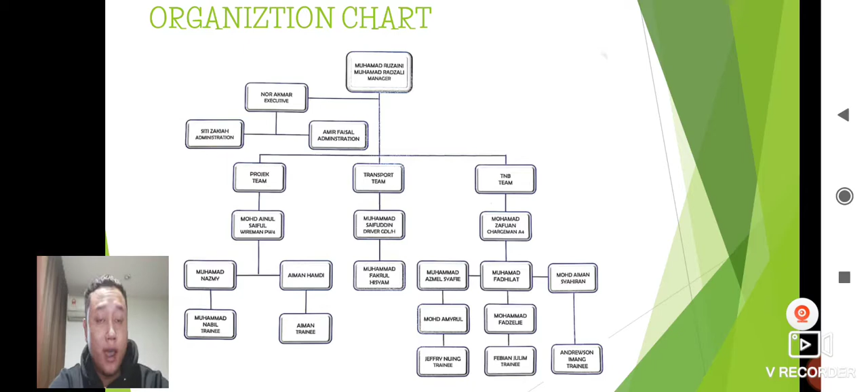The organization chart: the manager is Muhamad Ruzaini bin Muhamad Radzali. Our executive accountant is Nor Akmar. Siti Zakiah handles administration along with Amir Faisal. The project team is Muhammad Saiful. Helpers are Muhamad Nazmy and Muhammad Nabil, trainee at IKM Lumut.

The transport team is Muhammad Saifuddin as driver GDL/H, and Muhammad Fakrul Hisyam. The TNB team is led by Mohamad Zafuan as chargeman A4, along with Muhammad Azmel Syafie, Muhammad Fadhilat, Muhammad Shahiran, and Mohd Amyrul as storekeeper, Mohammad Fadzelie as storekeeper, Jeffrey Nuing, Febian Julim and Andrewson Imang, trainee at IKM Bintulu.

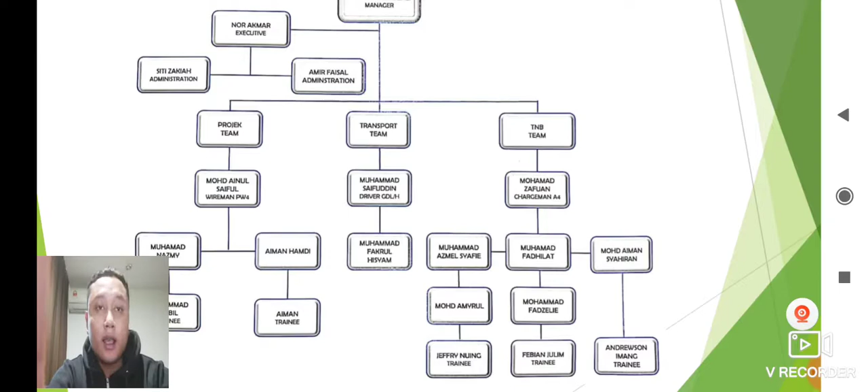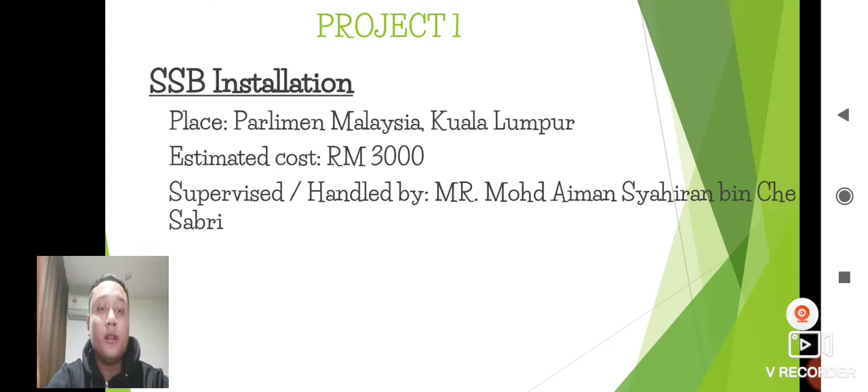Tasks and activities. Project 1: SSB installation, placed at Parliament Malaysia, Kuala Lumpur. Estimated cost is 3,000 ringgit Malaysia, supervised by Mohd Aiman Syahiran bin Che Sabri.

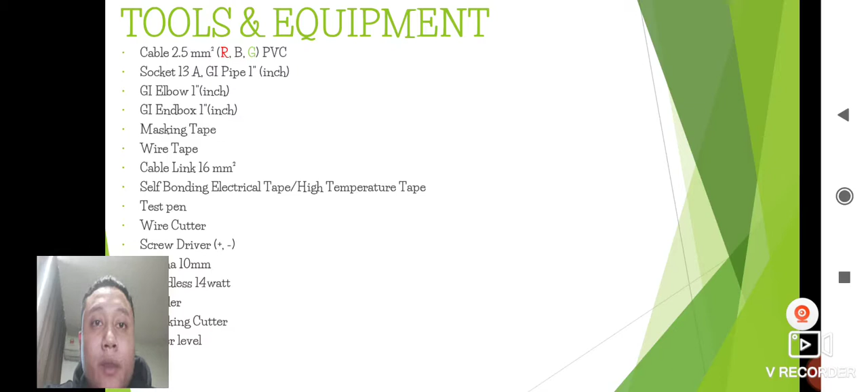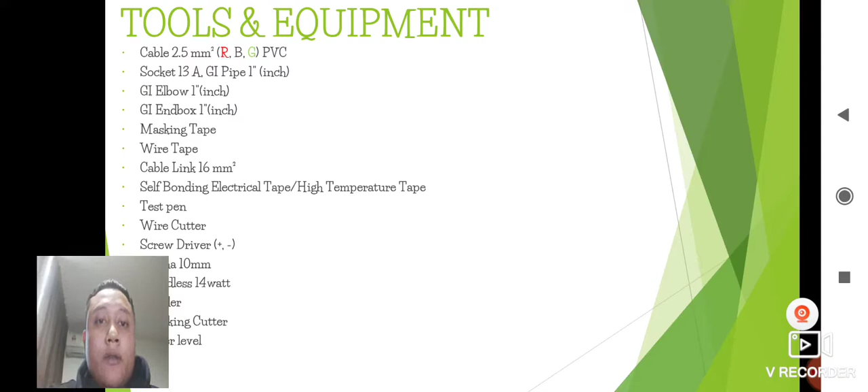Tools and equipment: cable 2.5 mm square, red, black, green PVC, socket 13 ampere, GI pipe 1 inch, GI elbow 1 inch, GI endbox 1 inch, masking tape, wire tape, cable link 16 mm square, self bonding electrical tape or high temperature tape, test pen, wire cutter, screwdriver, spanner 10 mm, cordless 14 watt, grinder, trunking cutter, water level.

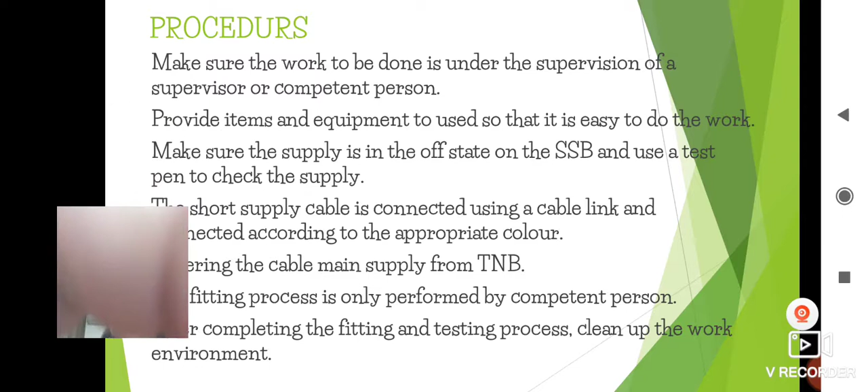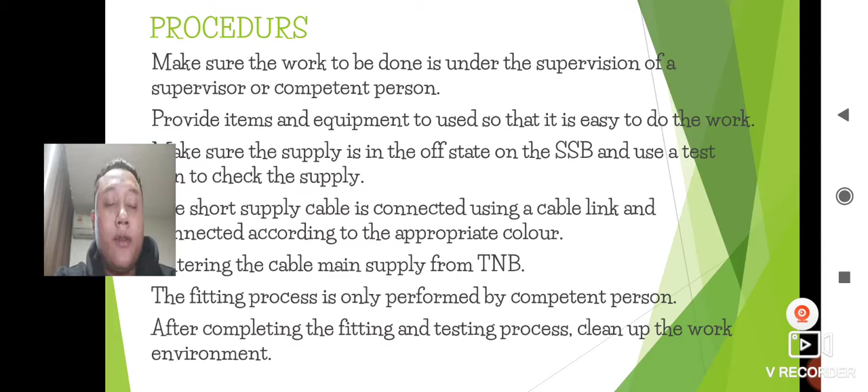The procedure is: make sure the work to be done is under supervision of a supervisor or competent person. Make sure the supply is in an off state at the SSB and use a test pen to check the supply. The short supply cable is connected using a cable link, connected according to the appropriate color. Enter the cable main supply from TNB. The fitting process is only performed by a competent person. After completing the fitting and testing process, clean up the work environment.

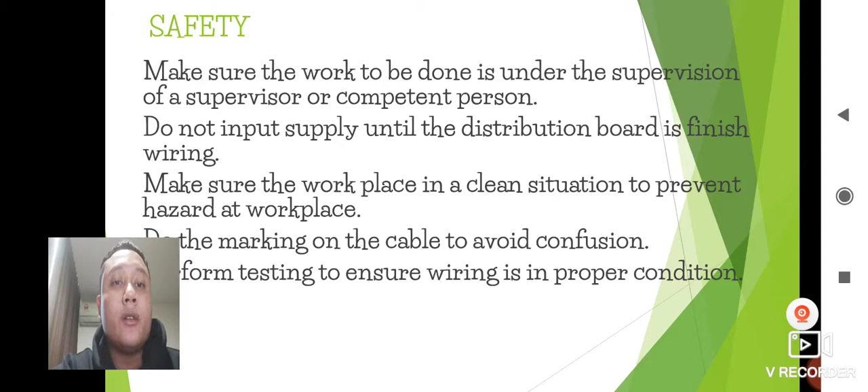Safety: make sure the work to be done is under the supervision of a supervisor or competent person. Do not input supply until the distribution board has finished wiring. Make sure the workplace is in a clean situation to prevent hazard at the workplace. Do the marking on the cable to avoid confusion. Perform testing to ensure wiring is in proper condition.

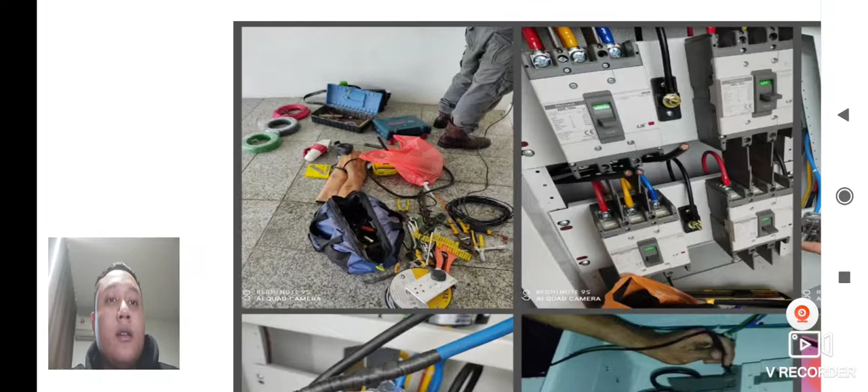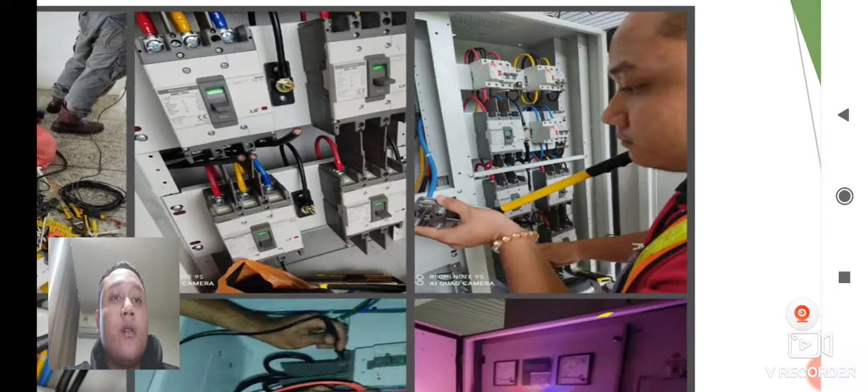As you can see in the picture, this is the equipment and tool, the MCCB. The trainer is doing the work, and here are other pictures.

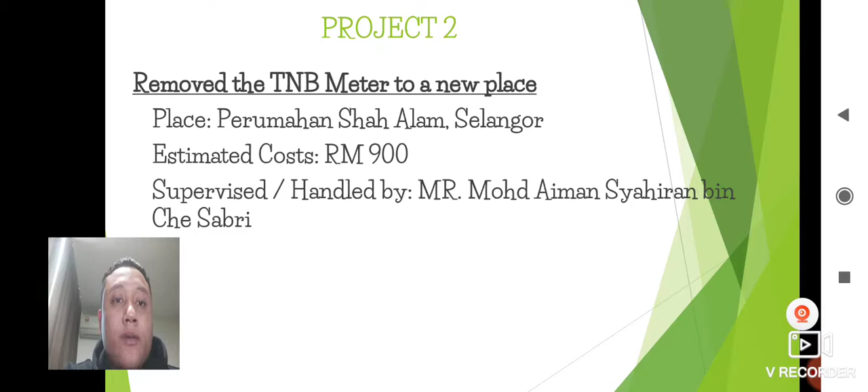Project 2: Remove the TNB meter to a new place. Location: Perumahan Shah Alam, Selangor. Estimate cost RM900. Supervised or handled by Muhammad Aiman Syahiran bin Che Sabri.

This is all the tools we need to do the work, especially the armor cable 2 core 25mm square SWA PVC and the heat shrink tube 25mm.

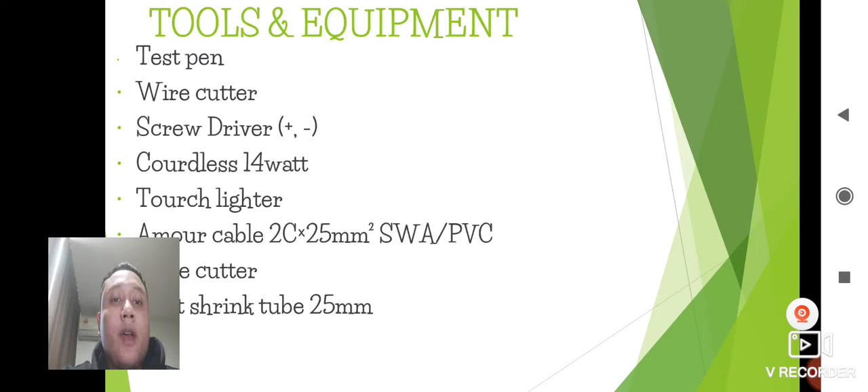The procedure is: make sure the supply is in off state on the meter and use a test pen to check the supply. Remove all components such as main fuse and meter TNB from the old place to the new place and the new component.

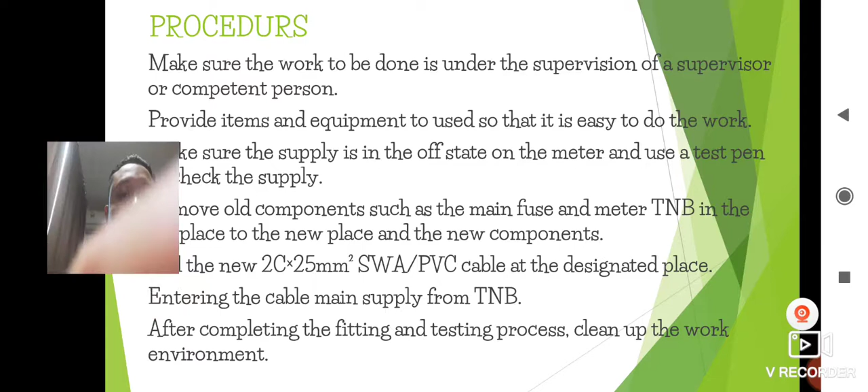Pull the new 2 core 25mm square SWA PVC cable at the designated place, entering the cable main supply from TNB. After completing the fitting and testing process, clean up the work and environment.

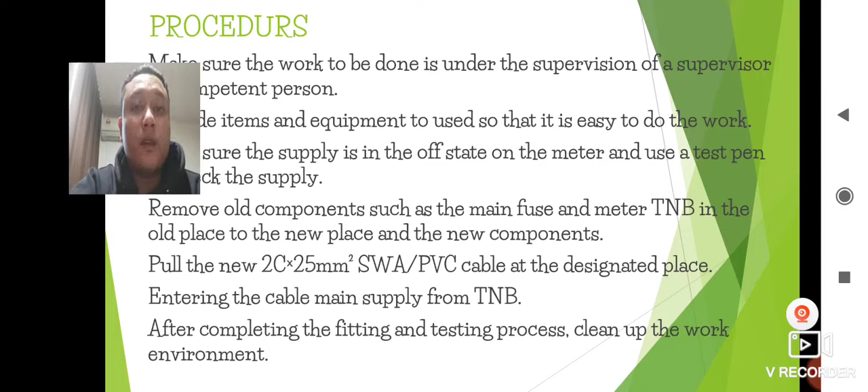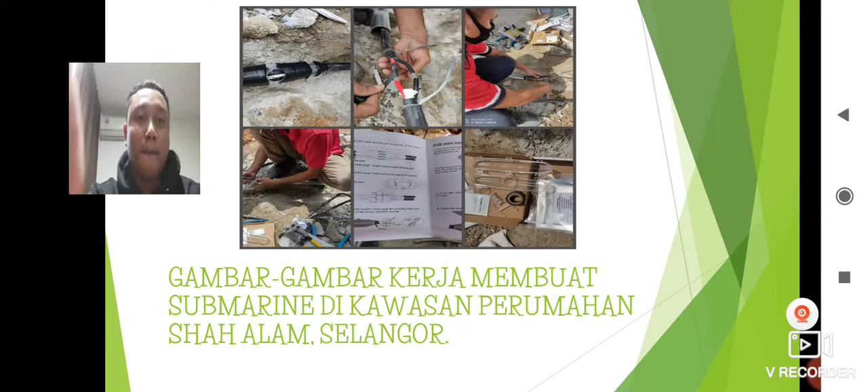Project 3 is plant rods earthing to the street lighting panel. Location: Sungai Chua, Kajang, Selangor. Estimate cost is RM3,000. Supervised and handled by Encik Muhammad Aiman Syahiran bin Che Sabri.

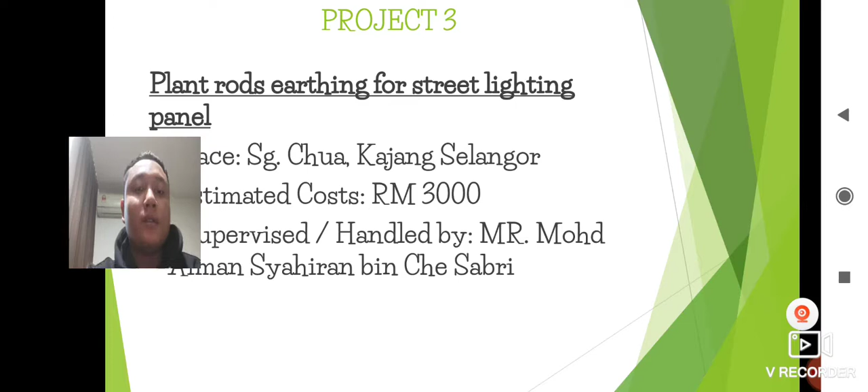As you can see, this is all the tools and equipment that we use to do the work.

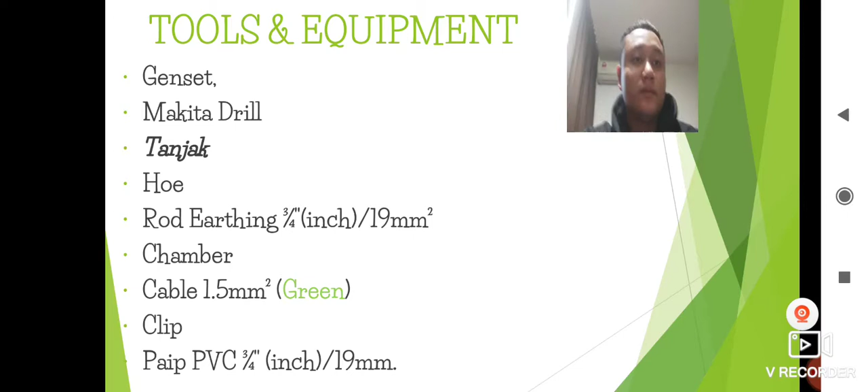Procedure: make sure the work to be done is under the supervision of a supervisor or competent person. Hold a place to store the rod and an earthing chamber. Plant the rod using a drill.

Reclose the chamber environment using soil. Make a test on earthing and the reading should get a reading below 10 ohm according to the specification of Suruhanjaya Tenaga or ST.

Make sure to use full PPE (personal protective equipment) while doing the job. Make sure the workplace is in a clean condition to prevent hazard at the workplace. As you can see, this is the picture while doing the earth chamber.

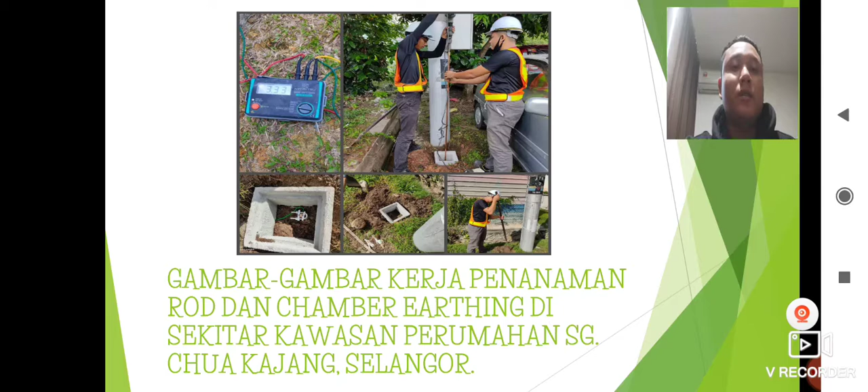Project 4 is street lighting panel installation, overhead. Location: Sungai Chua, Kajang, Selangor. Estimate cost is RM3,000. Supervised or handled by Encik Muhammad Aiman Syahiran bin Che Sabri.

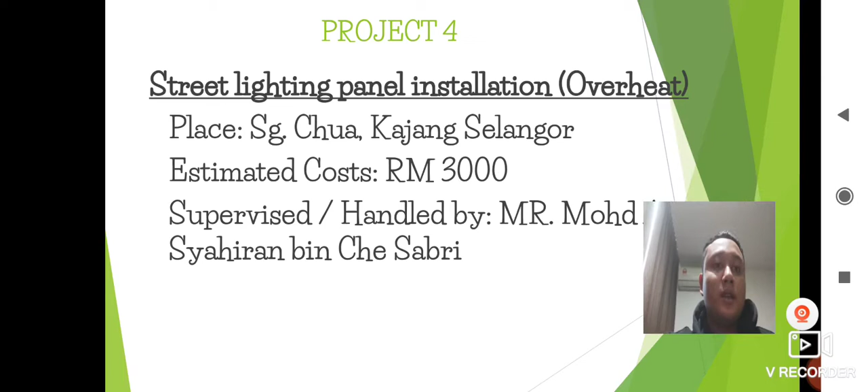This is the tool and equipment that we use to do the work. The important tool or equipment is the IPC, insulation piercing connector, 1.5 to 6mm square, and cable 16mm square ABC aerial bundle cable.

The procedure is: the PTW or permit to work form is filled in, prepared by a competent person wearing safety clothing and PPE (personal protective equipment), supervised by a supervisor or competent person.

Place the TNB signboard on the road and road cones around the workplace. Ride onto a skylift with a supervisor or competent person and bring work tools. Install the panel

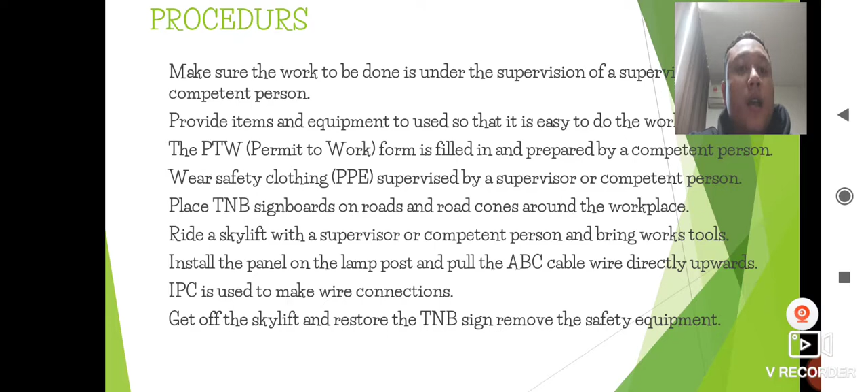on the lamp post and pull the ABC cable wire directly upwards. IPC is used to make the wire connection. Get off the skylift and restore the TNB sign, remove the safety equipment.

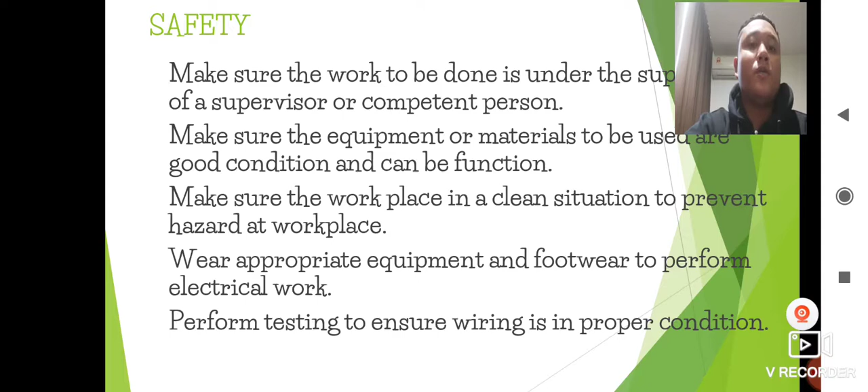The safety measures are: make sure the equipment and material to be used are in good condition and can function. Make sure the workplace is in a clean condition to prevent hazard at the workplace. Wear appropriate equipment and footwear to perform electrical works. As you can see, this is the picture that we took during the panel installation.

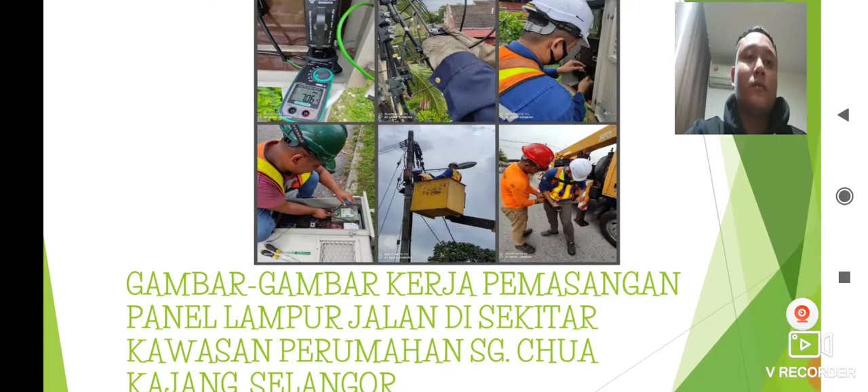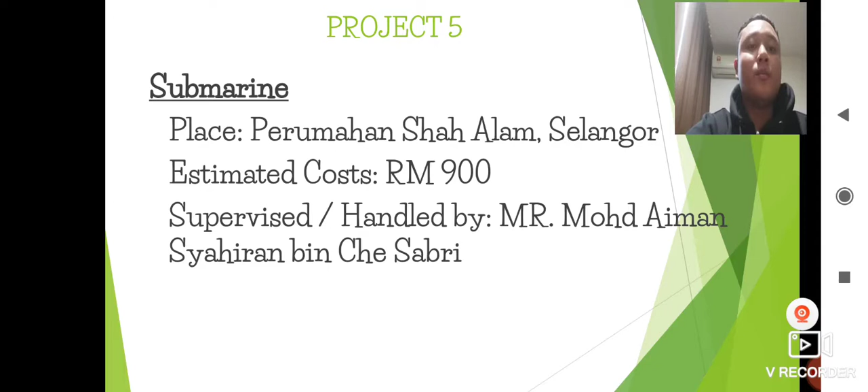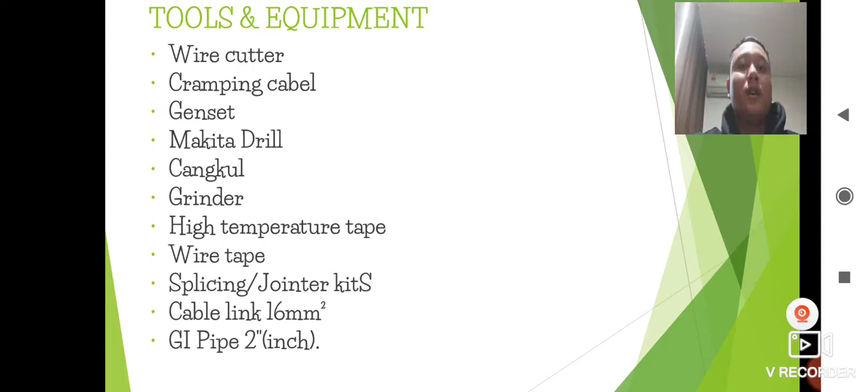Procedure: make sure the work to be done is under the supervision of a supervisor or competent person. Make sure the supply is off. Cutting paths as well as breaking paths using a grinder and drill.

Pull out the cable and connect using cable link 16mm square. The resin cable jointer is used to protect the cable, wrapped and tied. Use wire tape to prevent detachment.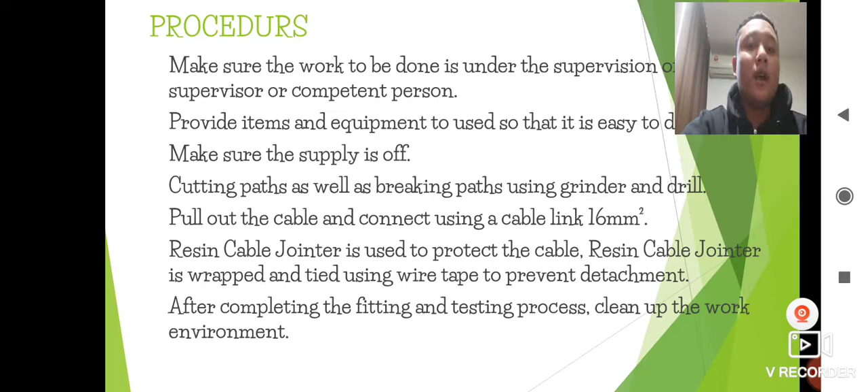After completing the fitting and testing process, clean up the work environment. The safety measure is to make sure the equipment and material to be used are in good condition and can function.

Make sure the workplace is in a clean condition to prevent hazard at the workplace. Make sure the supply is off or shut down before doing the electrical work. As you can see, this is the picture of the submarine cable.

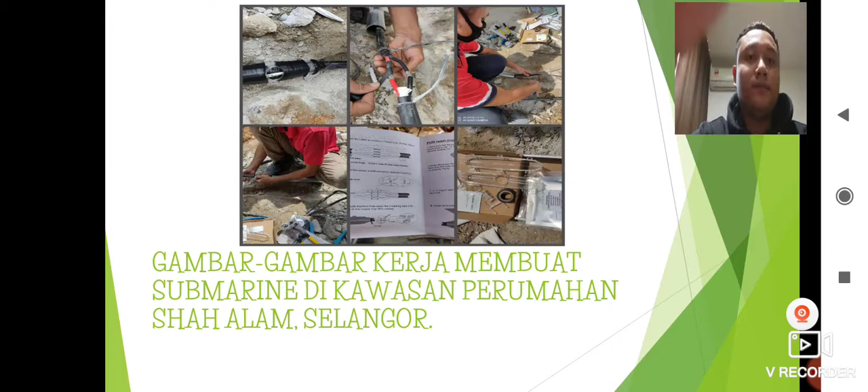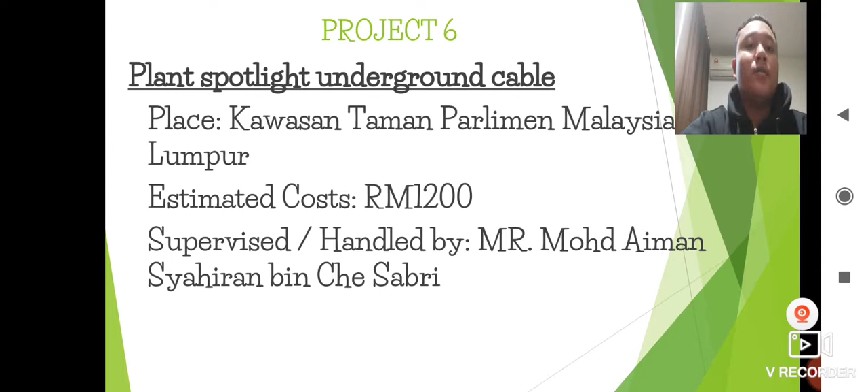Number 6 is plant a spotlight underground cable. Place: Kawasan Taman Parlimen Malaysia, Kuala Lumpur. The estimated cost is RM1,200. Supervised and handled by Encik Muhammad Aiman Syahiran bin Che Sabri.

Tools and equipment: wire cutter, screwdriver (plus and negative), test pen, cordless 18 volt, hoe, tanjak, pliers, armor cable 2 core 16mm XLPE SWA PVC, MCB C6 6 ampere, neutral link, cable 1.5mm square PVC red and neutral, screw, sand, and cable slab low voltage.

The procedure: provide item and equipment to use that is easy to do the works. Make sure the supply is off. Cutting and breaking the path using a hoe and tanjak.

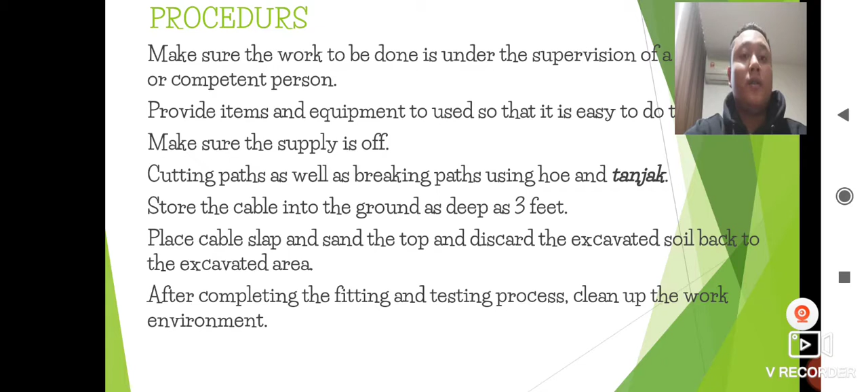Store the cable into the ground as deep as 3 feet. Place cable slab and sand on top and discard the excavated soil back into the excavated area. After completing the fitting and testing process, clean up the work environment.

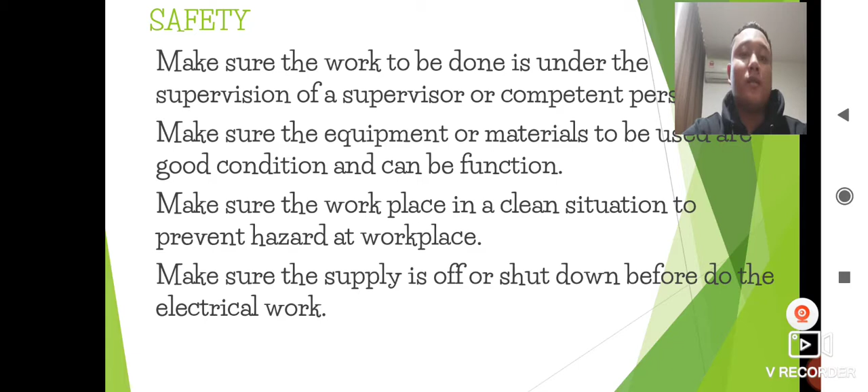Safety: make sure the equipment or material used are in good condition and can be functioned. Make sure the workplace is in a clean situation to prevent hazard at the workplace. Make sure the supply is off or shut down before doing the electrical work.

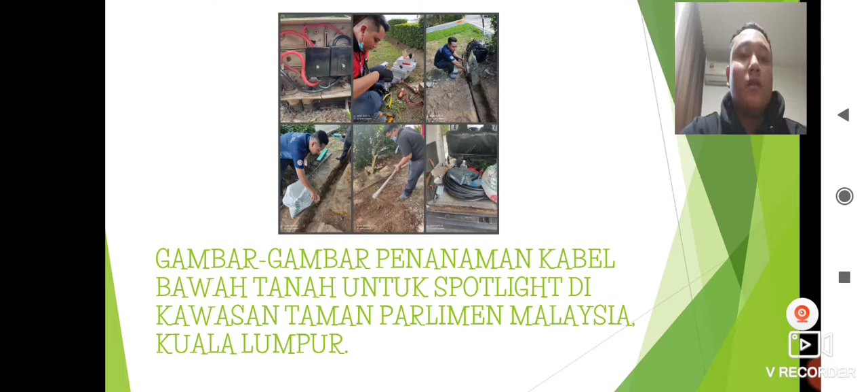As you can see, this is the picture that shows us doing the plant of spotlight underground.

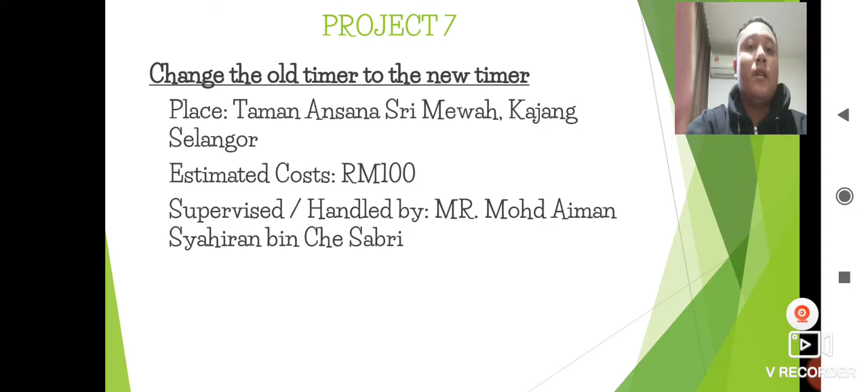Project 7: Change the old timer to a new timer. Place: Taman Ansana Sri Mewah, Kajang, Selangor. Estimated cost RM100. Supervised and handled by Encik Muhammad Aiman Syahiran bin Che Sabri.

Tools and equipment: cordless 18 volt, test pen, screwdriver, wire cutter, ladder, timer brand Hager, cable 2.5mm square, red and black.

The procedure: provide item and equipment to use that is easy to do the work. Make sure the supply is off, make the wiring on the timer, and make sure there is no connection fault. Set the timer according to the set time.

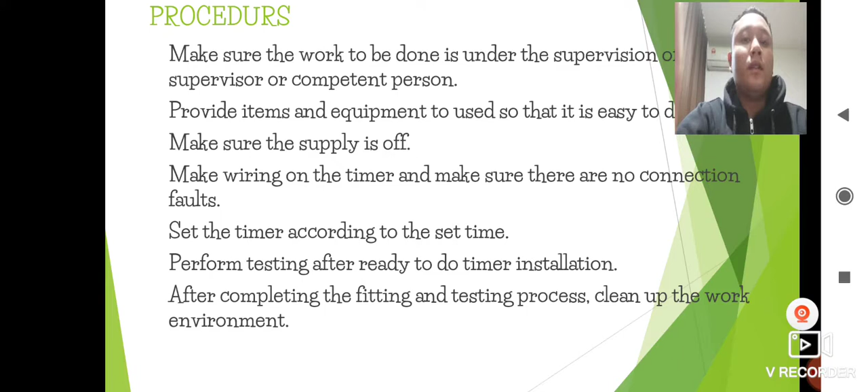Perform testing after ready to do the timer installation. After completing the fitting and testing process, clean up the work environment.

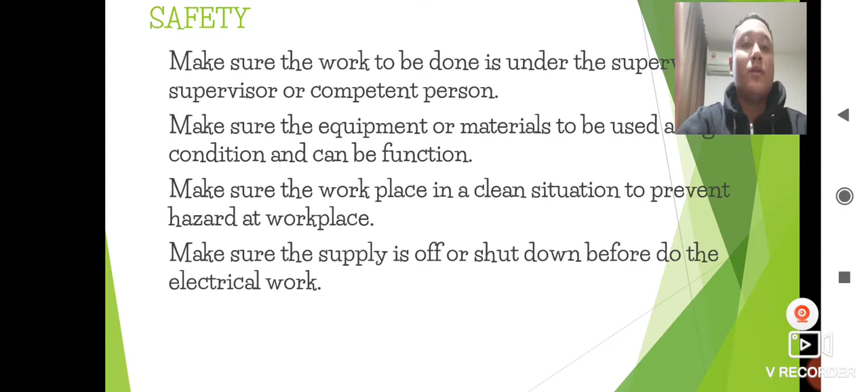Safety: make sure the equipment or material to be used are in good condition and can be functioned. Make sure the workplace is in a clean situation to prevent hazard at the workplace. Make sure the supply is off or shut down before doing the electrical work.

Project 7 is street lighting installation or lifeline. Place: Jalan Puncak Saujana, Kajang, Selangor. Estimated cost RM3,000. Supervised and handled by Encik Muhammad Aiman Syahiran bin Che Sabri.

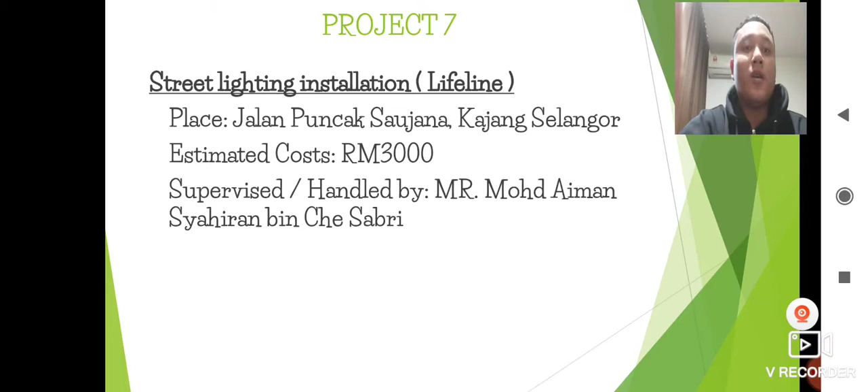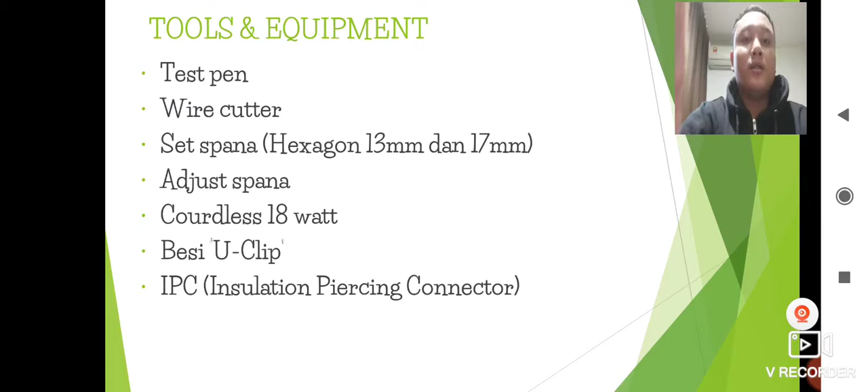Tool and equipment: test pen, wire cutter, set spanner, hexagon 13mm and 17mm, adjustable spanner, cordless 18 watt, besi, U-clip, IPC insulation piercing connector.

Make sure the work to be done is under the supervision of a supervisor or competent person. Provide item and equipment to use that is easy to work with. The PTW permit to work form is filled in or prepared by a competent person.

Wear safety clothing (PPE) supervised by a supervisor or competent person. Place the TNB signboard on the road and the road cone around the workplace. Ride a skylift with a supervisor and competent person and bring the work tools.

Take off the old street light and take off the old IPC. The IPC is used to make a wire connection. Get off the skylift and restore the TNB sign.

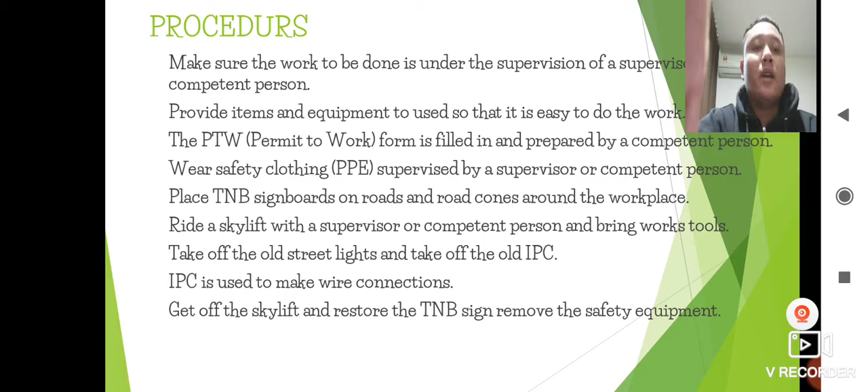Remove the safety equipment. The safety: make sure the equipment or material to be used are in good condition and can be functioned. Make sure the workplace is in a clean situation to prevent hazard at the workplace, and wear appropriate equipment and footwear to perform electrical work.